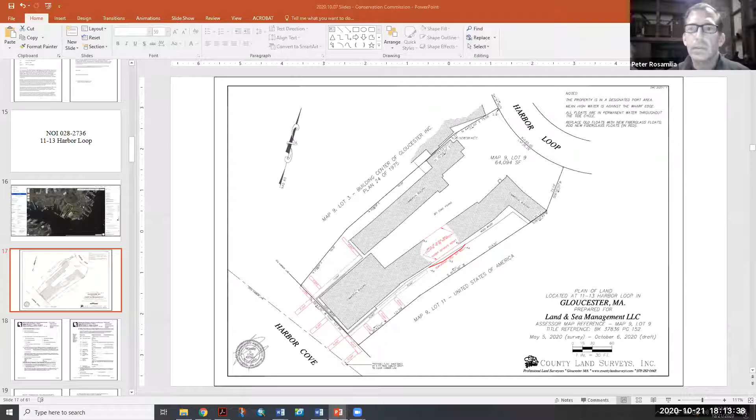All right, let me pull it up for you, Peter. Okay, go ahead, can you see what we see? Yeah, okay. Go ahead, Peter. Name and address for the record, sir? Peter Rosamilia, 1253-1255 Washington Street, Gloucester, Massachusetts, 01930.

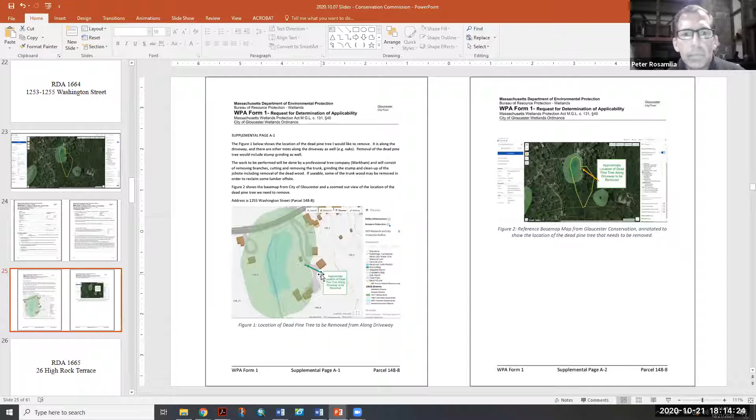The purpose of the request for determination of applicability is that there's a tree lining the driveway which an arborist advised is diseased, or actually dead, and needs to come down. The sketch shows the location - there's a wetlands on the property, and the tree is in the buffer zone, at the edge of it. The diagram shows the approximate location. There are 3 or 4 trees along the driveway, and the arrow is pointing to a pine tree that needs to come down. We want to remove it so it doesn't fall, and we need to do stump grinding so there's no tripping hazard. I believe the RDA was necessary because of the stump grinding.

So the request is for determination of applicability. I have a professional tree organization lined up to do it, and they advised going through the process as well. So I need to know if I can give them the green light to go ahead and remove the dead tree.

All righty then, so why don't we open it up for public comment? Does anybody in the public wish to speak for or against the project at 1253 or 1255 Washington Street? If you do, raise your hand - there should be a raise your hand button on your screen, or star 9 if you're calling in. Do you see anyone there, Adrian? I do not have anyone raising their hand at this time.

Okay, then we'll move on to roll call comments from the commissioners. Commissioner Charpentier, no comments. Commissioner Cook, no comments. Commissioner Feener, I have a question, sir.

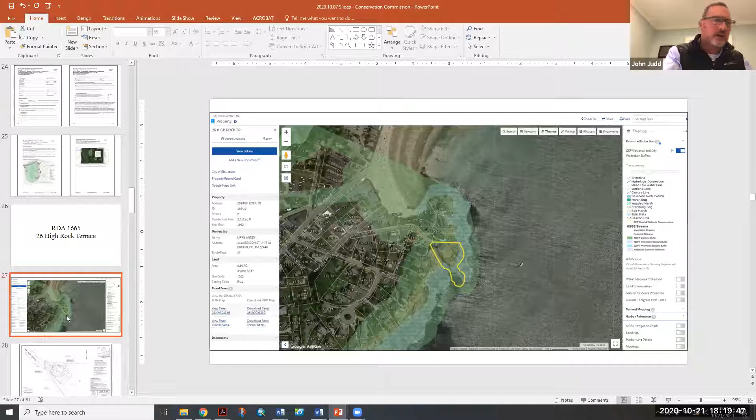Thank you, Madam Chair. For the record, John Judd, engineer with Gateway Consultants. This is a proposed replacement of an existing damaged dwelling situated basically on exposed rock and bedrock out at 26 High Rock Terrace. We're replacing the existing house that was damaged, and it's going to be raised and put on pilings on top of the exposed bedrock.

There's no vegetation to speak of on this property, and the performance standards for Coastal Bank are involved with sediment removal and so forth. There is no vegetation on this property to speak of. By raising the dwelling and pulling it back further from the ocean, it is basically an improvement to the situation on the property. So we're requesting a negative determination to replace this structure as shown. There is essentially no increase in impervious area as proposed, with the calculations shown on the plan.

Okay, thank you very much. I'm going to open this up for public comment. Is there anybody in the audience who wishes to comment on the project at 26 High Rock Terrace? As a reminder, if you're a member of the public watching, you can use the raise your hand button if you're logged in using a laptop computer or smartphone. If you've dialed in, you will dial star nine to raise your hand.

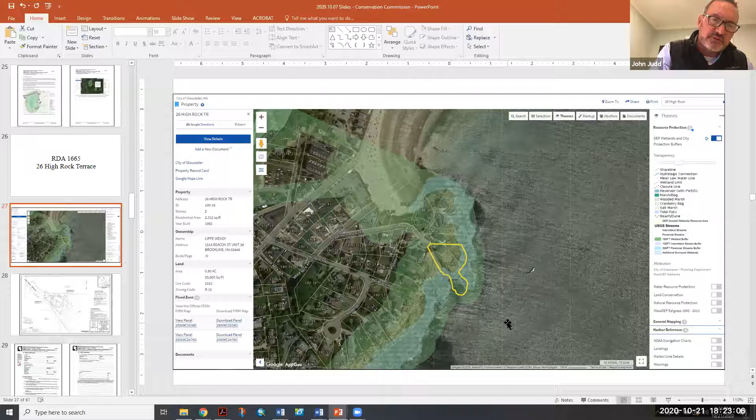So we have shown 76 square feet, which is not a lot. We would like some latitude on landscaping on the property to fit what the applicant would like to install aesthetically. We do have mitigation notes, including native shrubs, switchgrass and juniper, but they would like to incorporate that as part of a more aesthetic landscaping where none exists right now.

Okay, yeah, I have no problem with that. I know it's a hard area to plant. I didn't know if there's any runoff control design from the roof in this new building. If not, maybe we can do a couple of rain barrels to help with the mitigation aspect. I think that would be no problem. Yeah, should add that in. That'd be great, thank you.

Commissioner Gradwell, no comment. Co-Chairwoman Jackson: I had a question, do you anticipate that any blasting will be necessary? No, none at all. In fact, removing that existing concrete block foundation and raising it up would allow for the passage of water underneath the structure, where right now it's all being deflected. I see that as a tremendous improvement overall for the property, and as far as I'm concerned, that grants you some latitude in the landscaping. It's a very small area that you need landscaped.

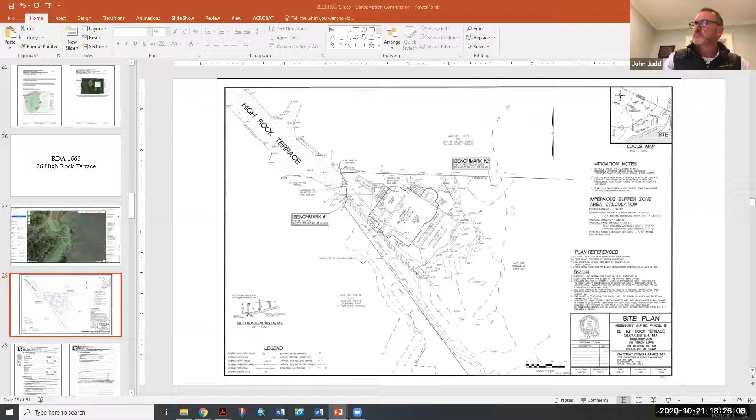Thank you very much. Thanks.

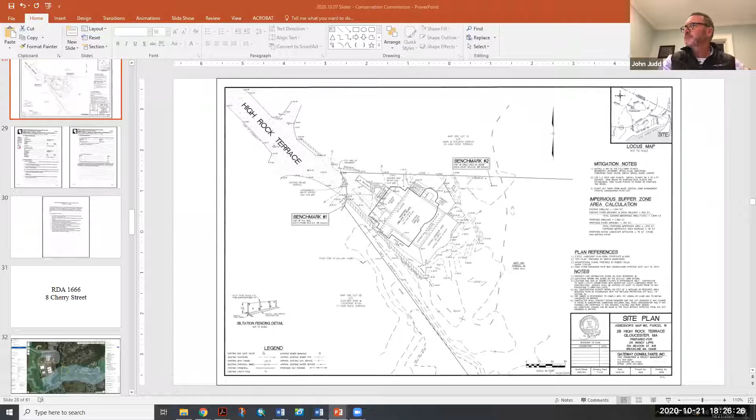Okay, do we have Rob back? Rob? Hello? Hello? Here we are. Yep, it's all yours. Okay, next up. Let me get my glasses back on.

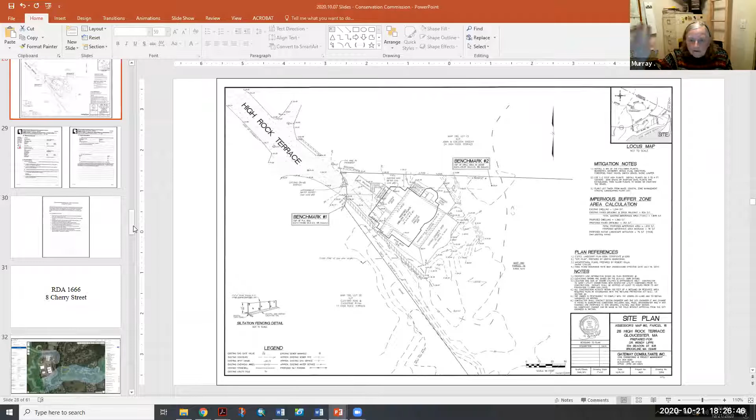RDA 1666. Ooh, a lot of sixes. 8 Cherry Street, Murray. Elizabeth Murray representing the applicant. I see her, but she's not unmuted yet. Right here.

Hello, can you hear me? Can you hear Elizabeth? Yes, yes. So a brief description, first your name and address for the record please. Elizabeth Murray, 8 Cherry Street, Gloucester, Mass, 01930. And my husband, Richard Murray, who lives here as well, is with me.

So we put in a request. You can see this is our property here. We put in a request to replace our damaged garage with a prefab garage, which you can see in this picture. Our garage was rammed and it's in a dangerous condition, and we were ordered to take it down. Then lots of things happened. We had to do the insurance, then we had COVID, then we had a heart valve transplant, and here we are.

We hope we could have done this already, but we hope we can do this fall. So when I was speaking with Adrian, the concern was because we have a perennial stream at the bottom of the property, which is 200 feet from the corner of our garage. We did attach to our form a topographical map showing the distance and also the various topographical lines. So when I was speaking with Adrian, the difficulty was, are we going to have sediment going down to the stream?

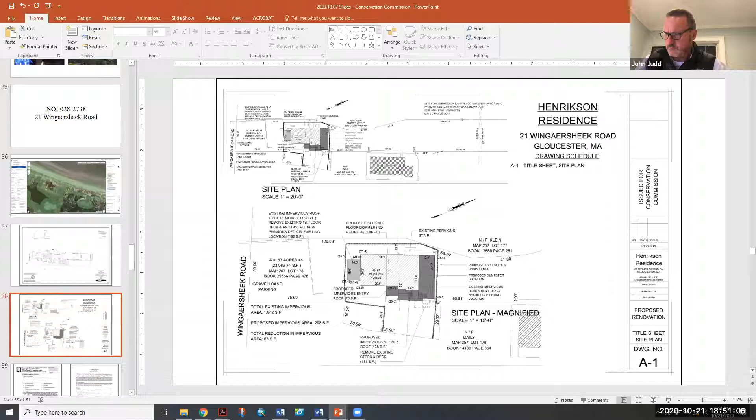Okay, thank you. We're going to open this up for public comment first. Is there anybody in the audience who wishes to comment on the project at 21 Wingaersheek Road? You can raise your hand if using a tablet or iPad, or press star nine if calling in. Seeing no comments at this time, I will close the public comment period.

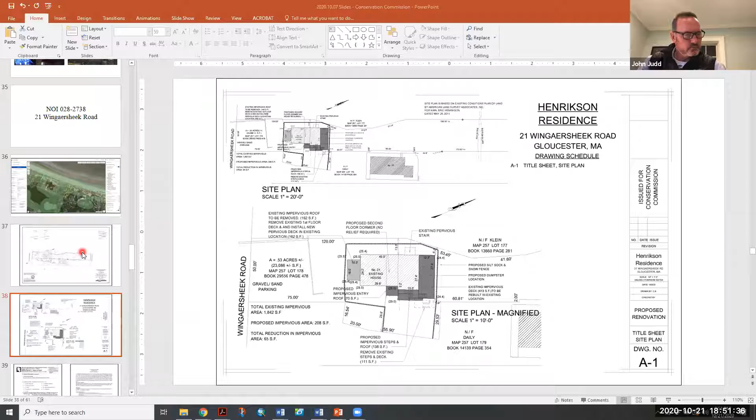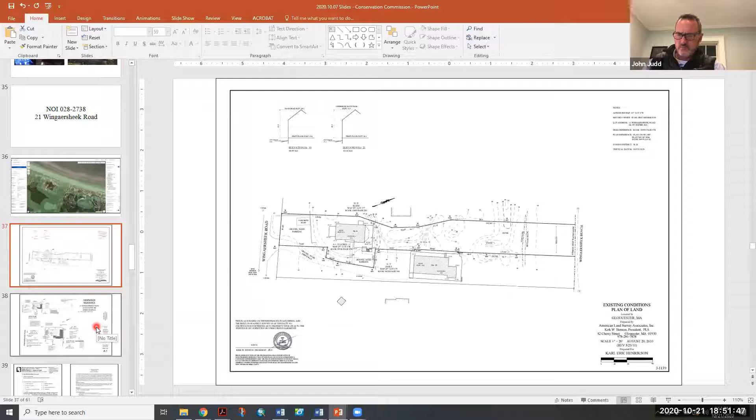We will open this up. Adrian, do you have comments on this? I do not—generally this is exactly what I expect this application to look like, and it comes with an appropriate narrative description. Ideally, I think we should be looking for the applicant to impact as little as possible on the site, because it is such a very well-established upland dune habitat. I'm hoping that the limit of work and the footprint here can be as small as possible. That's all.

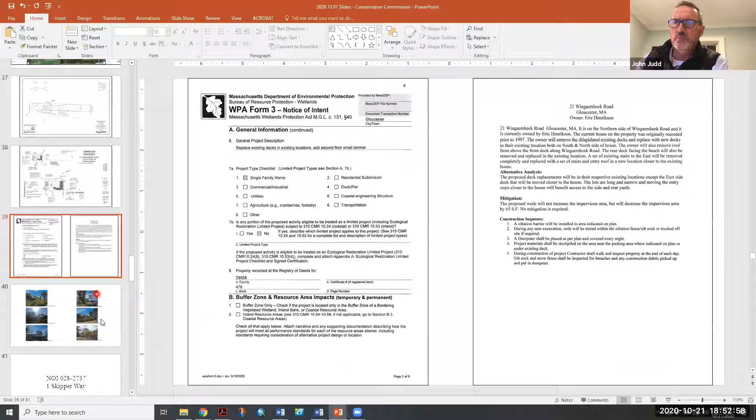John, why in this application have you not added the dead tree as part of removal of the dead pine that's in there? And also the maintenance of the wisteria by the driveway that is obviously pruned back. I think you may want to add this, especially the wisteria, because I'd love to see you have a line setback from the edge of driveway so we know in perpetuity what we're going to allow for safety reasons—we should have that delineated on this plan as it is an NOI. At the same time, it makes sense to try to get that dead Austrian pine out, doesn't it? It's relatively close to the house.

That may or may not, these are unique property lines here, John. I'm not sure that's entirely on this lot. There's a lot that is accessed, number 19, you can see the unique situation. If it doesn't work out, it does really pose a threat to the property owner, so you may want to talk to the neighbor.

But more importantly, the driveway with the pruning on the wisteria and stuff - it looks pretty, cut back a couple of times. The purple viney stuff in the picture, one of the last pictures you have, right here. I'd like to see you put a maintenance line, a delineation, on a plan for me. Yeah, we can certainly add that. All right, great, besides that, that's it. Thank you.

And you can get back to us about the tree at a later date, correct? Yep. So Adrian, my question is, if we think the tree might be on the property, should we condition that in, so if it is, we allow removal at this point without having to amend the plan, and if it isn't, you just say it's not our tree? Yeah, that's fine, I can include that in the order of conditions. And if the work isn't done, then it isn't done. That's fine, I just thought it'd be easier for the applicant. Thank you.

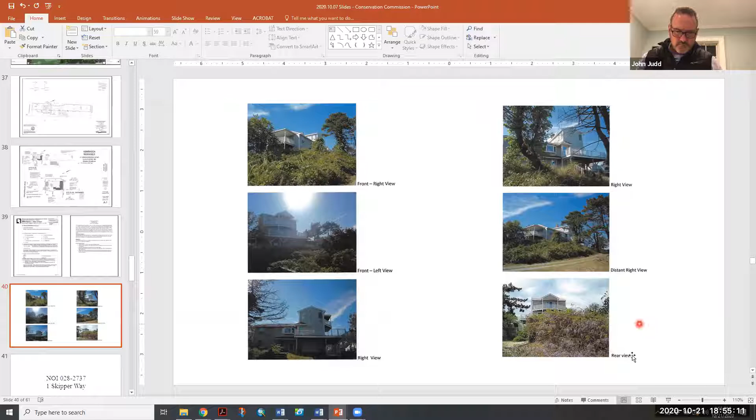Co-Chairwoman Jackson: just a comment on the siltation barriers. How much work space are you going to need? Can we keep this to a minimum? Can you give me a number of feet we can keep it at, John? Yes, we have the dimension for that existing impervious deck at 12.3, and we're about 3 feet beyond it.

So I would say 15 feet. I'm assuming you're meaning toward the coastal dune. Yes, so 15 feet off the main structure. Okay, Adrian, that good for you? Yeah, I mean they're gonna need to access it, but as little as possible because it's such a well-established site - you're not gonna get that back. Okay, so everything you can do, John, to keep that at a real minimum. Sure.

All right, 15 feet max towards the dune. No further comments? Not that I am aware of. Okay, then I will entertain a motion to close the hearing. Oh, actually, sorry about that, I apologize - this project is going to be subject to Natural Heritage Endangered Species Program review, and I do not have anything back yet from Fish and Wildlife. Okay, so we have to continue this. Correct. In that case, John, will you send me an updated plan with a limit of work?

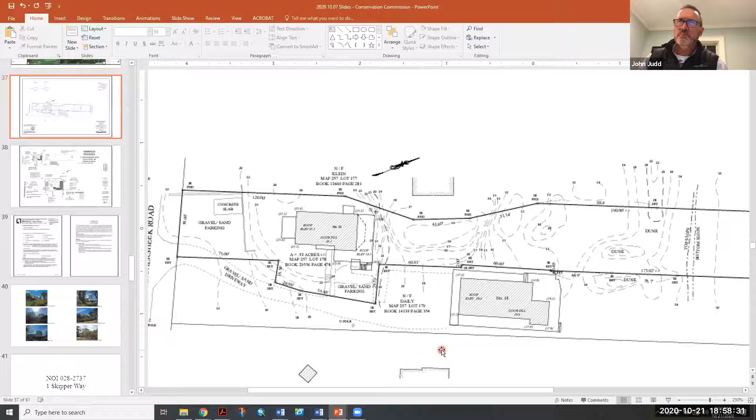Commissioner Gradwall? I see you there. Commissioner Gradwall, yes, thank you. And Co-Chairwoman Jackson, yes, thanks.

Has Mr. Geller returned? Okay, yeah. This is Bill Cook, I have to recuse myself on this one. Okay, can you hear me? Yes.

Okay, so next up is notice of intent - no DEP number yet - but before we do this, I hate to stop in midway, have we got anything from Bill? Bill's here, he's on. Okay, so we can get back to him after.

Next up is notice of intent for One Skipper Way, Russo, John Judd, Gateway Consulting, representing.

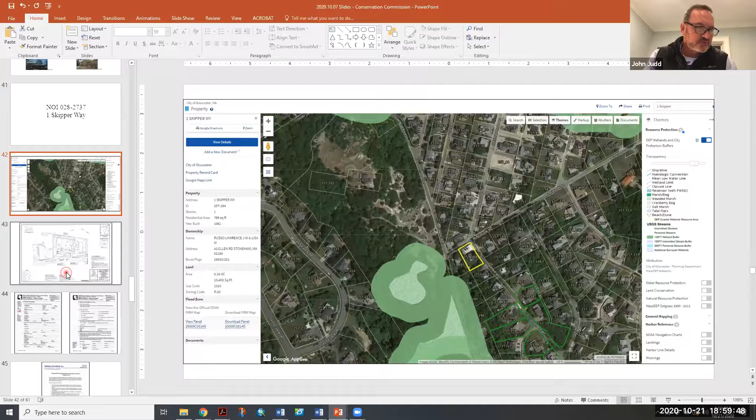It's an existing cottage that is proposed to be replaced. The project has been approved through Zoning Board of Appeals. It was vetted through that board, and the neighbors have all been notified of this meeting as well as that meeting, and they have received the plan as part of the review package for ZBA. So what we're looking to do is replace this structure.

This would be a slab on grade due to the high groundwater on this property. Those of you familiar with this area and this particular spot know that this is at the bottom of Skipper Way, a steep hill, and the water sort of makes its way down here. So we had shallow groundwater, so we are replacing the sewage disposal system with an advanced treatment system.

I spoke to Craig LaPiccolo, the health agent, and he's issuing that permit this week. Again, this is an upgrade for the sewage disposal system, which is currently in failure. And the proposed building as shown is obviously larger, but the reasoning for that is there is no ability to put a basement on this property because of the water table.

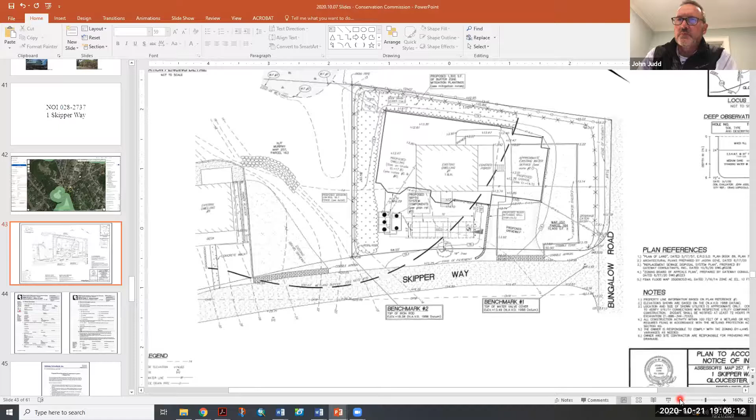But if the rest of the commission is not, again, John and I are obviously somewhat simpatico on this, but I wish other commissioners would chime in. I don't know if they have to, but if someone else has a differing opinion or is in agreement with us, that would be helpful as we move forward with future projects with this relatively significant amount of planting and management of it.

So it doesn't need to, Rob? Yep, it's Anjo here. I would support a planting plan for this. It is extensive.

Okay, we have no problem supplying that, done by a professional landscape designer with native plants of the choosing of the Russos. Is it possible to have that as a condition? That would be the only thing, so they can at least get the process going. Everyone's busy with their design work on that end. And certainly before any building permit is issued, after the appeal period, we would have that plan ready for the commissioners and Adrian.

I don't necessarily have a problem with that. No, me neither. Okay, I had a question for you on that though. So if the planting plan is submitted, we'd like to usually determine if it's going to be an ecological benefit to the area. So if we just wait for you to submit it to the agent prior to the beginning of work, we as the commission are going to have an opportunity to review it. Is that a correct statement? So we can put our two cents in, so to speak.

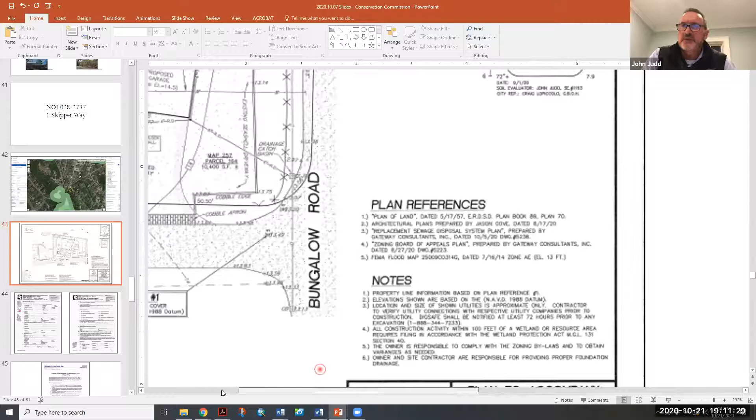Understood. On the mitigation notes in the lower half of the plan, we have some suggested native plants typical for the saltwater area - switch grasses, shore juniper, bearberry, bayberry, as well as beach plum and so forth.

As you know, we typically have a 2-season mortality requirement for these planting plans before the certificate of compliance is given, and Adrian as the agent has the ability to say this is just not adequate when she does her inspections. I can assure you the Russos are quite anxious to do a nice job with the landscaping and make it a nice buffer there. They understand that when we have such an increase in impervious area, this is what we need to do, and they're fully aware of it and excited to do a nice job with the landscaping.

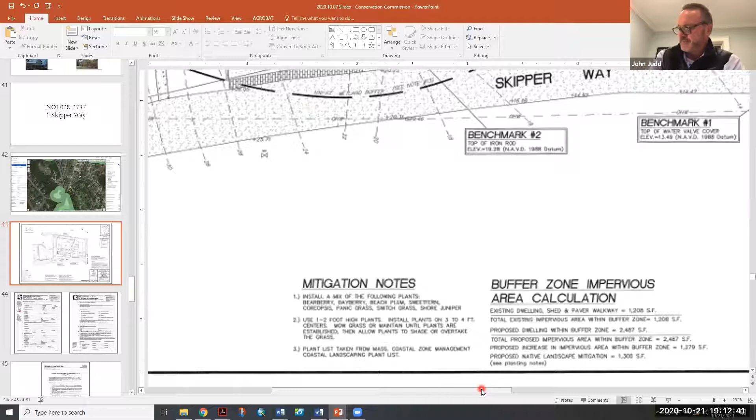I don't know if we want to do a roll call one more time through the commissioners, Adrian, to see if they have any more comments for or against allowing it to move forward with a planting plan.

Commissioner Charpentier: I just want to say I'm good with moving forward with the planting plan. Commissioner Cook - oh, Commissioner Cook is recused. Commissioner Feener.

The only thing about the planting plan listed to me is that sometimes a native species is listed and people often purchase a hybrid of that or a separate variety, and in this case that cannot be allowed. So it has to be true, pure Latin names, no additional varieties. That's one stipulation I would have to have - I can't tell you what to plant, but I can enforce that it can't be a separate variety that could be invasive moving forward.

Second, you have on the planting plan that every plant would be 3 to 4 feet apart. However, you should base that on mature size of the plant material and figure out locations based on height - some might be 5 feet at mature height, some might be 2. You need to plant those based on their mature height, not just a standard 3 to 4 foot grid.

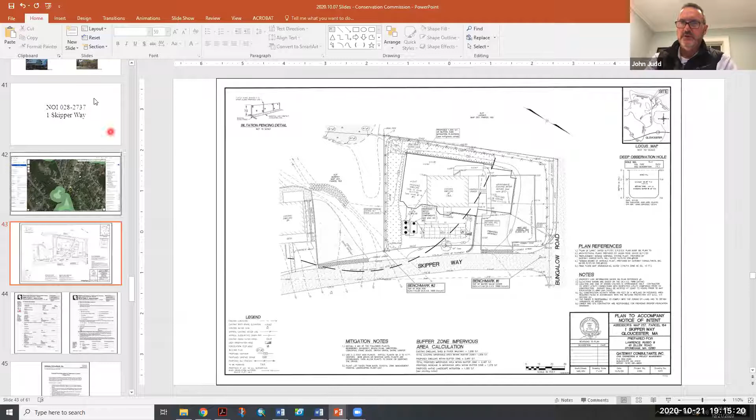Charpentier seconds. Roll call vote: Commissioner Charpentier, yes. Commissioner Cook - he's recused. Commissioner Feener, yes. Commissioner Gradwall, yes. Co-Chairwoman Jackson, yes. And Co-Chair Mangala, yes.

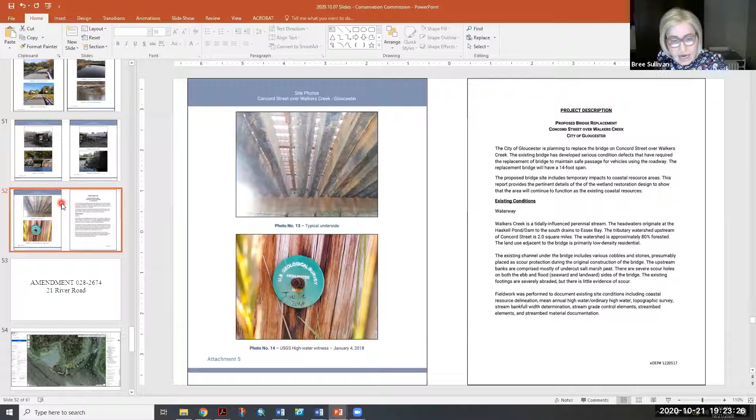The superstructure, which is where the wooden stringers are, is really not the problem with this bridge. So the current superstructure is a welded gridded deck on several wooden, treated wooden beams on concrete capped ashlar granite masonry abutments. And I'm fairly certain that this is dry laid. It may have had some concrete between the ashlar masonry, but typically if it did, it probably didn't last very long in this environment.

So it was probably a dry laid abutment, which in and of itself is actually not that bad. The problem that we have at this location is the footings that the bridge is founded on. What appears to have happened is over time, the currents as well as the chemical makeup and the fact that it's brackish degraded the footings at this location. We were quite surprised when we inspected the bridge to find that the footing is worn away in several locations. And if not for the redundancy of the method of the foundation, this bridge would be in much more serious shape.

So with that, we applied to the state on behalf of the town under their small bridge replacement program. This falls under the small bridge replacement program because it's between 10 and 20 feet. The span of this crossing right now is approximately 14, 15 feet, somewhere in there. So it was accepted as a good candidate for that program, which essentially gives the town funds to repair this bridge. They give money towards the repair and the engineering design for this bridge. I believe the grant was $500,000 at this site.

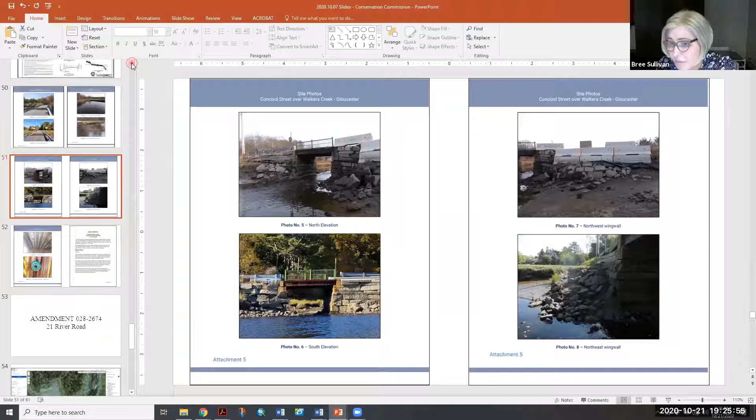So as you can see from the photos, the footings aren't the only issue, of course. We have the northwest wing wall, which has collapsed a few times, mainly because of where it sits relative to the Walker's Creek. When the tide floods or the tide comes in, this wing wall is actually on the outside of the bend. So when the tide is coming in or flooding, the currents will basically impact right at this northwest wing wall. So that kind of erosion action really is hard on an area like that.

So yeah, if you zoom in there, you can see the bend - yeah, there you go. So you can see it comes around the bend, and currents typically have a tendency to be on the outside of the bend. And so it basically runs right into that wall. So that's one of the contributing factors to why that northwest wing wall has had problems.

So what we did when we explored the bridge site is we did a full survey, did some different investigations. One of the things we did is we did borings here, geotechnical borings to determine what the soil structure is under the bridge. And much to my amazement, it's probably the only location in Gloucester that doesn't have ledge. I literally can't believe that we didn't hit ledge. We went down 60 feet on one of the borings and didn't hit ledge. It's like a huge crevasse in Gloucester. It's the only place in Gloucester.

I actually years ago worked, and I'm dating myself, I worked a little bit on the E1 sewer system in town. So I'm dating myself there, I know that was many years ago. So I'm very aware of the geological conditions. I was quite surprised, which really kind of affected how we had to design the bridge. But we'll get into that in a little bit.

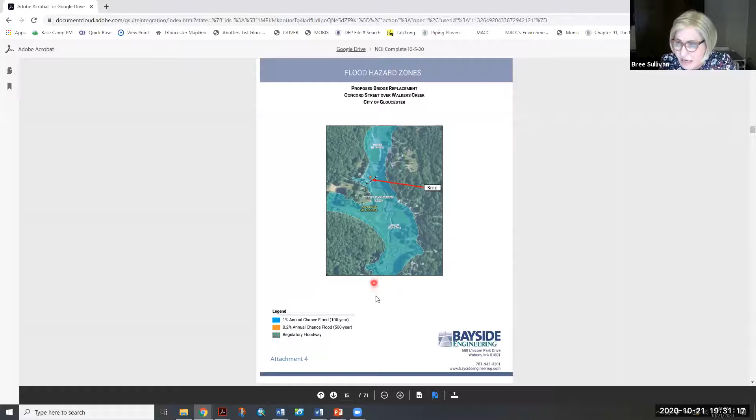Basically what we did is we looked at a number of combinations, and the combination that we choose for locations like this is the 500-year tidal storm surge. And so as you know, living near a creek like this, there are a couple of factors. There's normal tides that are caused by lunar effects. And then there's a tide associated with the storm surge, which is an increase in the tide. Depending on where you are, it can be worse, less or worse.

So in this location, since we have this great record of January 4th, 2018, that's a good measured indication. But what we also did is we also looked at the extreme tides measured at the Boston gauge, because that has the longest recorded tides out of all of the tide gauges.

So we looked at all of these different tides, and actually the January 4th event was not the most extreme event that we designed for. Looking at the combinations, we actually have the 500-year tidal plus the 50-year riverine tide, which means a 500-year tide and a 50-year runoff storm.

And so typically for this type of crossing, because it's a local road, we would only use the 10-year riverine flow to design the bridge. But the combination of the tidal and the riverine, it's really not going to make much of a difference.

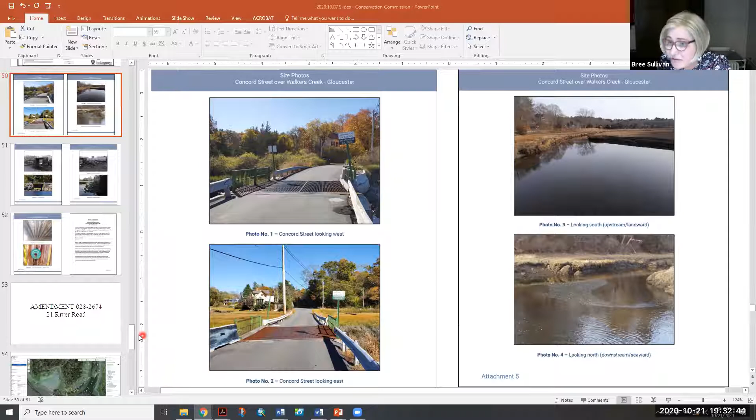Now, one of the things we looked at here is what would happen if we changed the opening. So I don't think it's any surprise if you look upstream and downstream, there are massive scour holes, which says that the bridge is undersized. When the tide comes in and goes out, it has to squeeze through the opening, so the velocity increases and creates scour on the upstream and downstream sides.

So you have this great widening of the creek, and then once it slows down enough, it will narrow back to its normal width, upstream and downstream. So one of the things we like to do is we like to look to see if we can fix that without impacting properties, of course.

And this is a good picture of it here. And as you can see, the landward side is actually, well, I guess they're about the same when it's flooded, the water area is about the same. So we want to look and see if we could correct that.

Unfortunately, if you look at the flood map, this crossing is such a restriction that the ocean side of the crossing, the flood elevation is actually 13. And on the landward side, the elevation is actually 10. So there's a 3-foot difference.

Now, there's some question to, and I wasn't able to find the background calculations for this, but I think the reason why that's 13 is it has to do with wave runup, which we don't get at this location. I think they just carried it from further north.

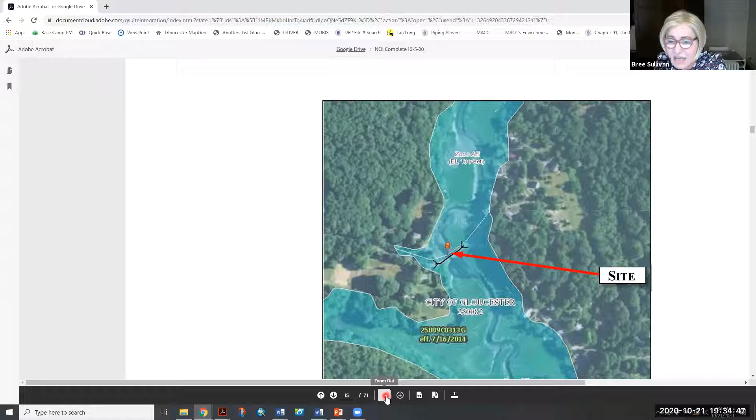Strangely enough, to the west of this site, there's a line where it jumps down to 10, and it's part of this same tributary. Some further analysis was done, and you can't see it here, it's in the flood map. That lends a little credence to the fact that it's probably not elevation 13 on this side.

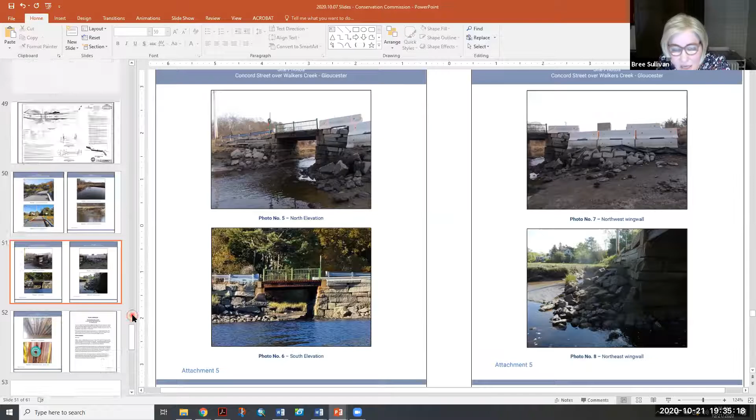But we go with what the federal regulations say, so we use the 13. Now, interestingly enough, the roadway and the bridge crossing is approximately elevation 10. In fact, the intersection is elevation 8. So the bridge sits at about elevation 10 or 9, the existing bridge, and then you go down gradient to the intersection, which is actually lower.

So interestingly enough, when we have the tidal change, when it changes from high tide and starts ebbing, it actually flows across the intersection first. So that's where the greatest relief comes from.

The other thing we look at in these areas is, do we want to raise this structure, get it out of the water? The issue with that is if we raise the structure, it's not going to do a bit of good because the intersection is going to be flooded. And if we raise the intersection too, what we're actually doing is creating a larger dam, which is a larger issue in itself, stopping a lot of the flow at higher flows, and we could adversely impact the salt marsh on the southern side of the street.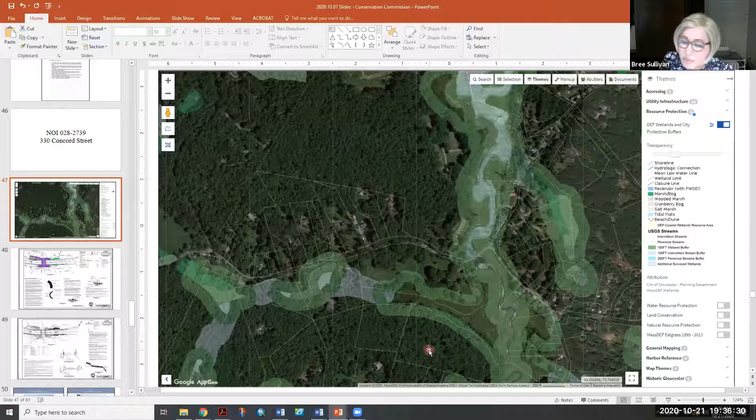So there are a lot of factors at play here, a lot of variables, and they all really point to: we have to do an in-kind replacement with respect to the hydraulic opening. So in an effort to minimize impacts, we determined that widening the road is not advisable.

Now, I understand this is a tough location. The current roadway width in the vicinity of the bridge, within 50 feet of it, is about 15 feet wide, so you're not going to fit 2 cars. You can barely fit a car and a pedestrian without feeling like you want to jump in the water. Widening the roadway here would incur severe salt marsh impacts, and I'm fairly certain the commission would not appreciate that.

So we're basically proposing to replace what we have here in kind with respect to dimensions. The opening under the bridge is going to be 14 or 15 feet, somewhere in there, and the width of the roadway is going to be around 14, 15, 16 feet, somewhere in there. Basically what you see now is what it'll look like after we're done with respect to dimensions.

With the only caveat being that the northwest wing wall has kind of taken on its own life over there, and we're actually going to correct some of that because we're going to put a proper wall in, and there will be some scour protection there for the reasons I mentioned earlier. So that quadrant we're hoping to undo a little of what's fallen into the land underwater. There is no salt marsh on that side.

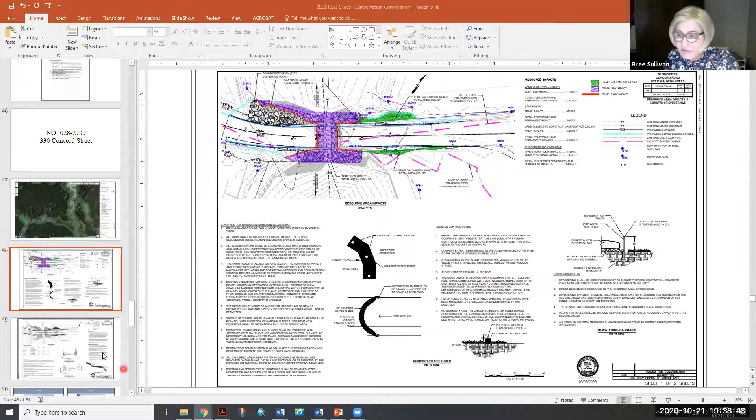So with respect to the proposed structure, what we're looking at, I have to take a look at the bridge plan. In the materials I submitted, there's an environmental plan, which is what we're looking at now, and then there's a bridge plan set, which is the set we send to Mass DOT for approval, for structural approval, called the Chapter 85 process. And this is not the right plan, so let's take a look at this. I apologize, I should be better prepared.

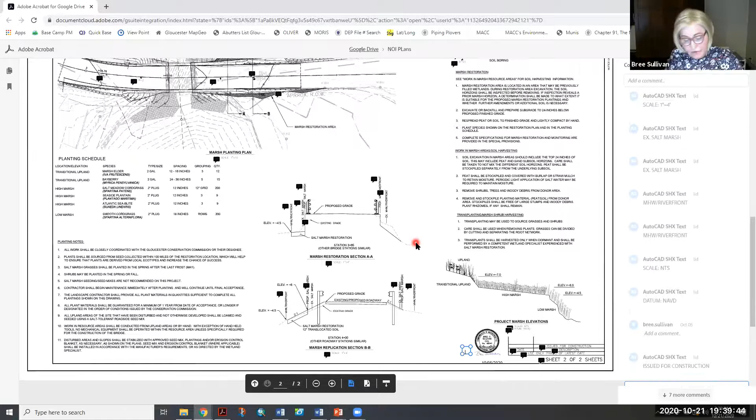So the proposal is to remove the existing structure in its entirety. Essentially what happens in cases like this, where we have to control for the tide, is they would come in and put a cofferdam of some sort to block the water from the construction area. In fact, with crossings like this, that really is the largest single expense, is controlling that water, obviously.

What we're looking at doing is replacing everything right down to the foundation, and that's going to require a cofferdam and removing the existing material.

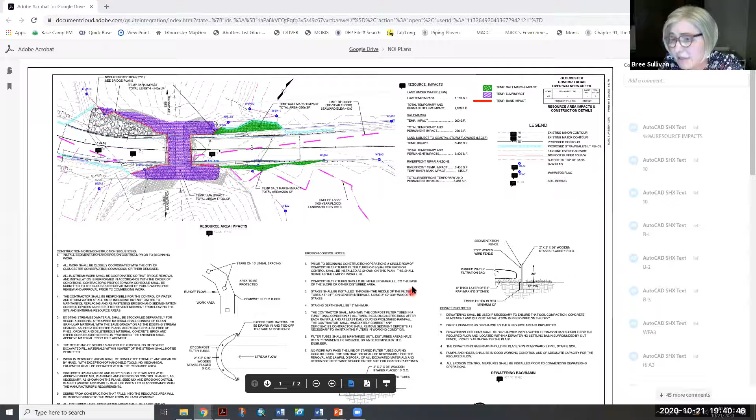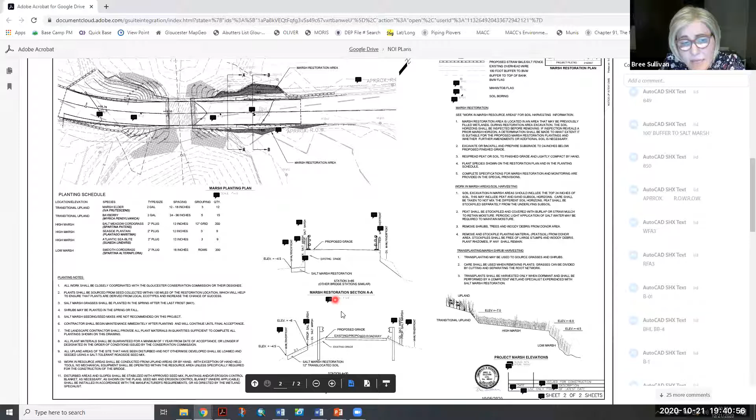With roadways and crossings like this, depending on when they were constructed relative to the Wetlands Protection Act, oftentimes they just pushed material out into the marsh until they reached the place where they wanted to make the crossing, then built it. So there could be all kinds of unsuitable material there, and it can get very in depth when they start digging out the material. They could find all kinds of things.

The plan is to rebuild the substructure with reinforced concrete, specially treated to handle the brackish environment. There are a few things they do to the concrete to make it more durable. Then a new superstructure will be put on the bridge, along with standard bridge rails that will withstand a vehicular impact and keep vehicles out of the resource area.

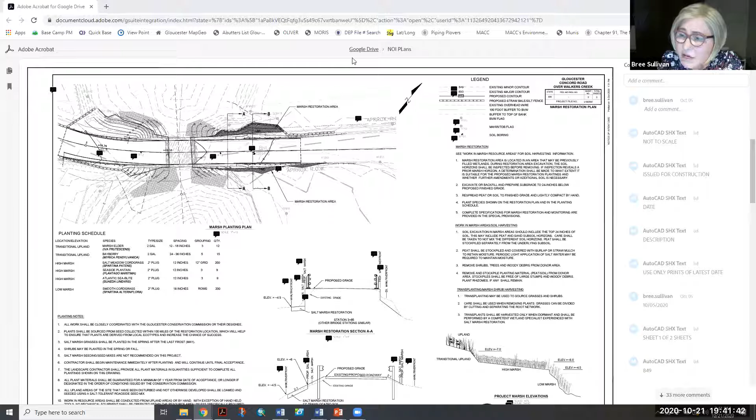These are pretty much the typical bridge rails you're used to seeing on MassDOT projects. The color can be chosen by the municipality, there are a few choices that can be made with respect to that. Typically, green is what people like to use in these areas.

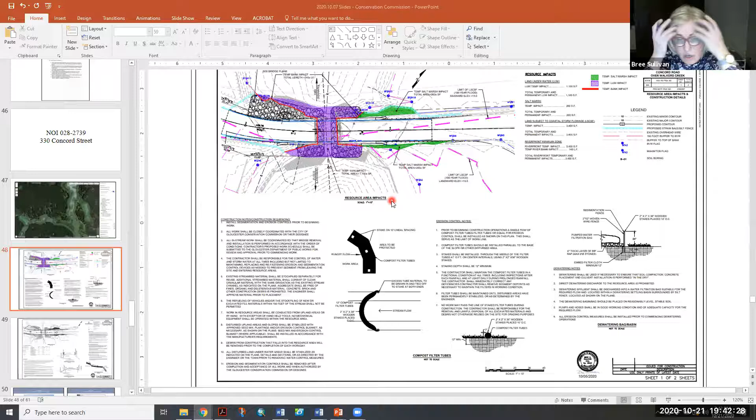With respect to the resource areas, at this site we have salt marsh, land subject to coastal storm flowage, and riverfront area for Walker's Creek. There's riverfront area, land underwater, and bank. The nature of replacing a crossing is working in a resource area.

Probably the only really impacted areas are the land underwater and the salt marsh. The plan is to basically restore the salt marsh after construction, and you can see that marked on this plan. The land underwater is marked in purple, and the salt marsh temporary impact is marked in green. The red line on either side would be the approximate location of the bank.

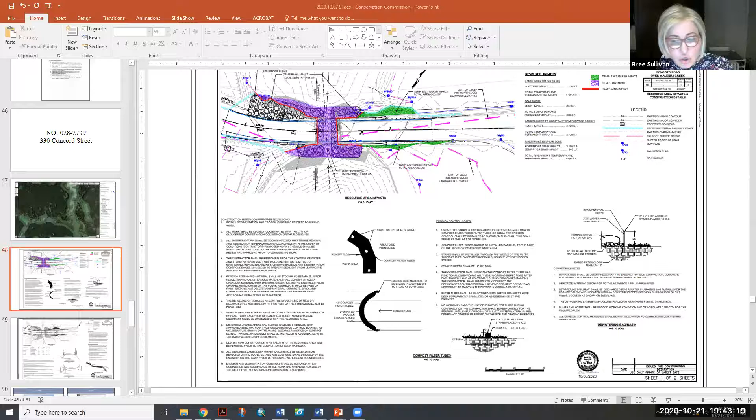If you could go to the next page - the proposal is to replace the structure and then restore the salt marsh. On that plan, you can see the details of the salt marsh restoration plan.

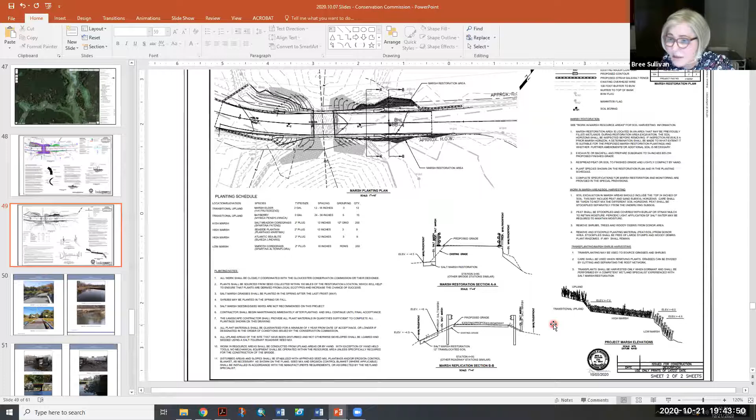Salt marsh has a very specific number of plants in this area, specific species depending on where in the marsh it is: low marsh, high marsh, transitional, upland. These species should be very familiar, and I actually did identify these species at this site. The plan would be to either locally source the replacements or harvest them before construction and then replant them during the appropriate time of year for the best success.

We also have in here a specification for soil if we need to provide additional soil. Typically in these locations, a sandy mixture will work fine. The details are on this plan here, and there's also a narrative - a salt marsh restoration narrative in the notice of intent documentation.

There will be a requirement that a wetland specialist who has specific experience in salt marshes in this area will supervise that portion of the project. That's basically my presentation.

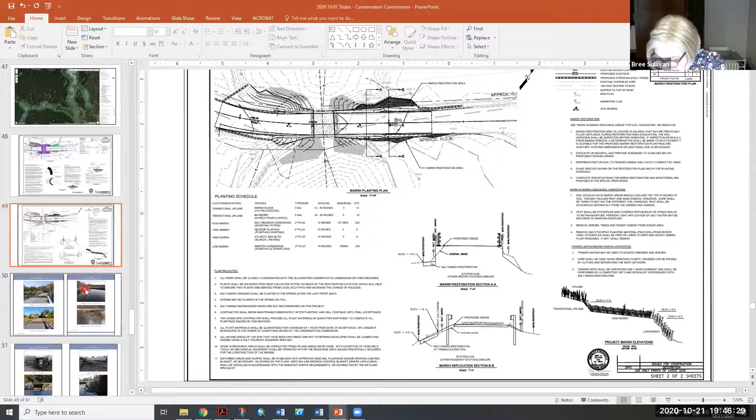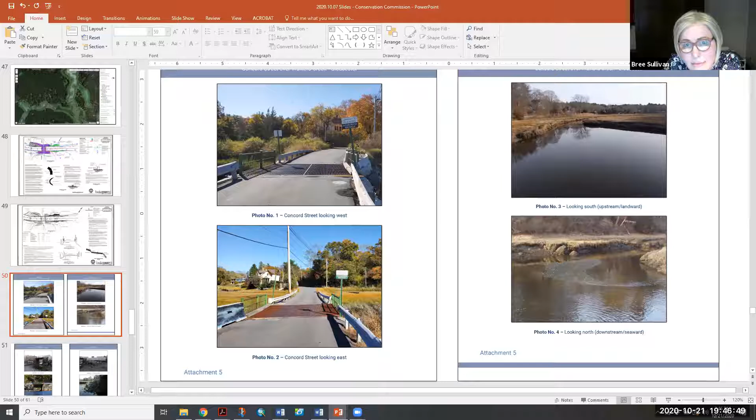This project or area was identified when we were with Mass Bays and looked at tidal restrictions, and this is still going to be a tidal restricted area. As the applicant talked about with the scouring on both sides, I would recommend that to the west side it be opened larger, so there'd be less scouring. I also note that this area contains shellfish - underneath the bridge there were European oysters, and just downstream there were soft-shell clams. So I think there's an omission there, and it's an opportunity for the city to restore a very unique environment between this crossing and the Walker Street crossing.

Surprisingly, there's very little freshwater impact to vegetation. This is a very unique area - it's an ACEC, and I encourage you not to let this opportunity escape us.

And the opportunity being opening up one side, is that it? Yeah, particularly towards the west - towards the east there's more salt marsh, and to the west it's scoured quite a bit on both sides. I'm not surprised that, doing a great deal of soil evaluations in that area, the applicant encountered wash material, because essentially that's what's there.

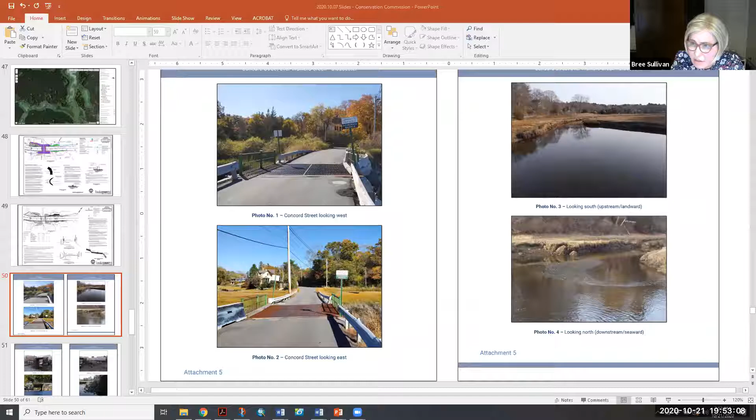So, where when you go to the west, there's a fork in the road there where it could be closed to local traffic only. And then of course at this intersection that we're looking at here in photo 2.

Okay, Bill, did you get your question answered? Yeah, that was the biggest thing, whether they're going to do one side and then the other side, or do both left and right at the same time, and then do something in the middle afterwards. I'd like to see that sequence of how they're going to do that. So that's means and methods, and that would be up to the contractor.

Personally, I would like to see it one side at a time, but I think with the height of this, the amount of bracing that's going to be required to withstand the tide shift, they may actually need the bracing across the channel, but that's up to the contractor to come up with the method that works for them. But there will be in the specifications that river flow must be maintained at all times. Okay, thank you.

Commissioner Feener. I had a couple of comments and one question.

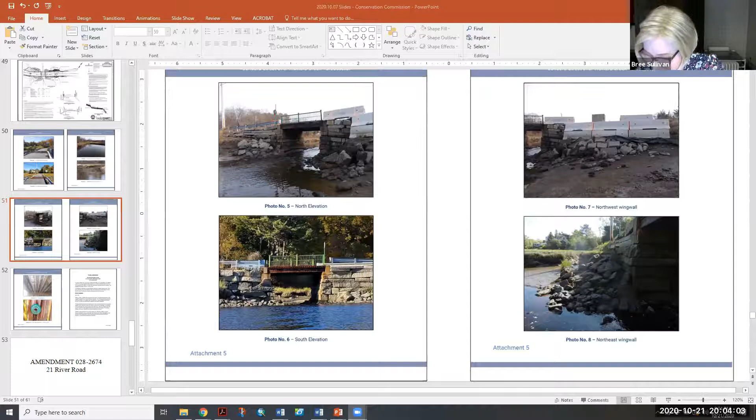Do we have a DEP number? Yes, we do. It is 2739. NOI 028, 2739, 330 Concord Street, to the meeting of November 18th.

Charpentier seconds. And a roll call vote. Commissioner Charpentier, yes. Commissioner Cook, yes. Commissioner Feener, yes. Commissioner Gradwall, yes. Co-Chairwoman Jackson, yes. Co-Chairman Gulla, yes. Thank you very much.

I appreciate it, thank you. Thank you. Have a good night.

Next up, okay, amendment, coming back. 28, online. Whoop. Here's Bill.

28-2674, 21 River Road, Singer. Bill Manuell at Wetlands and Land Management representing.

Good evening. Geez, I apologize about that, King Philip, Adrian. At the time, probably when you were saying, hey Bill, you have anything to say? I was having computer problems here and not getting any audio. It's okay, anyway, I'm sorry those people had to wait around. We just do what we can.

21 River Road, nothing as complicated as that last hearing. This should be fairly simple. The commission issued an order of conditions to do a little home renovation last year, and that is essentially complete. Now the owners would like to replace a small deck and patio that they have.

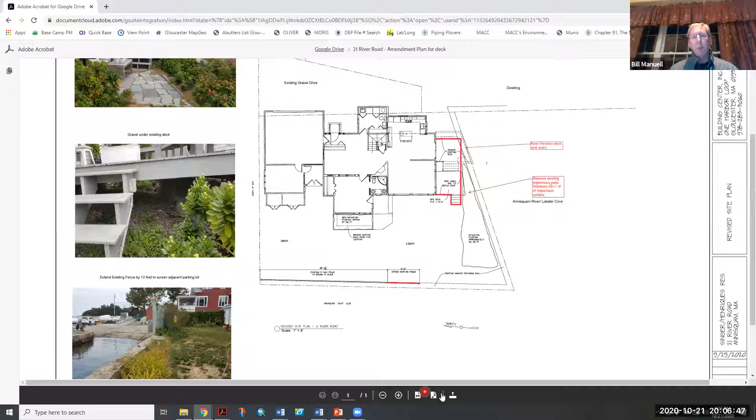So there are two areas of mitigation shown totaling 300 square feet. But our request for an amendment is actually going to take away 92 square feet of that impervious patio, but we're not going to touch the mitigation. So you're actually going to get a little bit more bonus. We'll just do the complete mitigation that you approved.

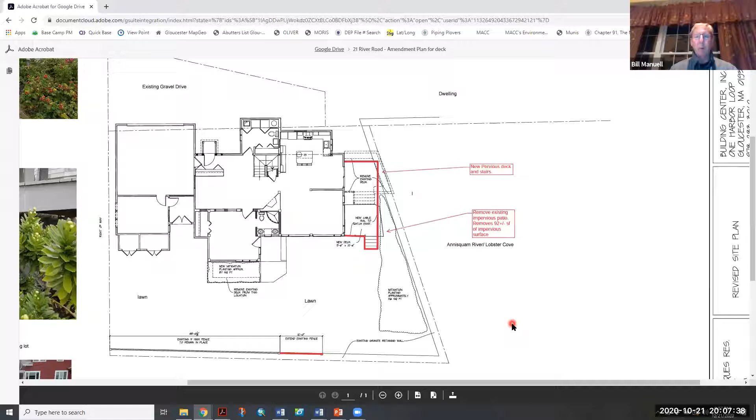Again, zoomed in, there's the red outline of the new deck with the stairs down to grade. Lobster Cove and the Annisquam River are directly to the right of that, and that straight diagonal line is a masonry seawall. It sticks up above grade about 18 inches, so it's the perfect erosion control barrier for the probably 3 or 4 sonotube holes that have to be dug.

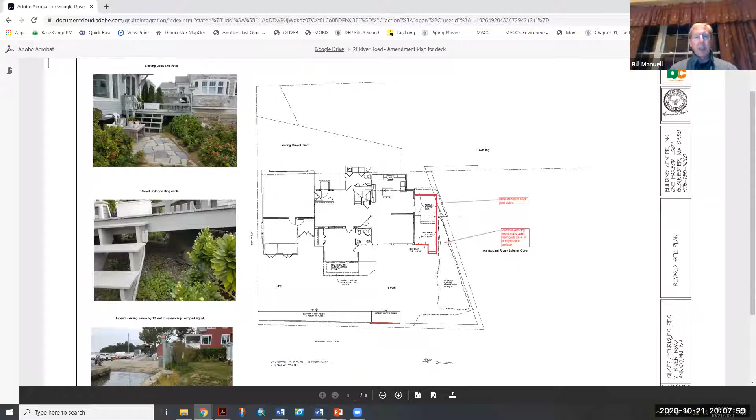Fairly low impact. Over to the left side of the plan, you can see some pictures of the existing deck and the stone patio with the wall, and there's some Rugosa rose along the wall. There's stone under the existing deck, as shown in the middle photograph, and they'll do the same treatment under the enlarged deck. They'll just take out that patio and put some crushed stone there.

Everything becomes pervious. The second part of this amendment request is they'd like to extend a wood privacy fence between this site and the yacht club, at the very bottom of the plan. They'd like to extend the fence by 12 feet, which would give them a little privacy, because right now the boat launch for the yacht club is directly on the other side of that fence.

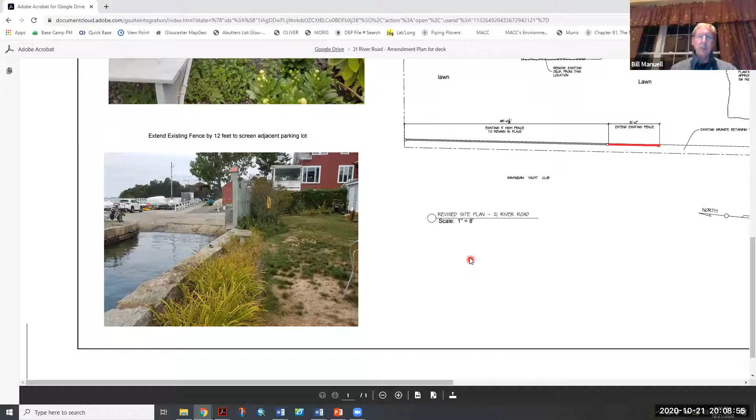It's got some great views right into their picture window, into their living room, so they just want to extend that fence 12 feet. The current fence sits on a granite block wall, so that will continue, just push that out another 12 feet, meaning no impact to the ground surface. So you get a little bit of improvement here: 92 square feet less impervious surface, and we'll keep the original amount of mitigation. Hopefully you'll see your way to an amendment here.

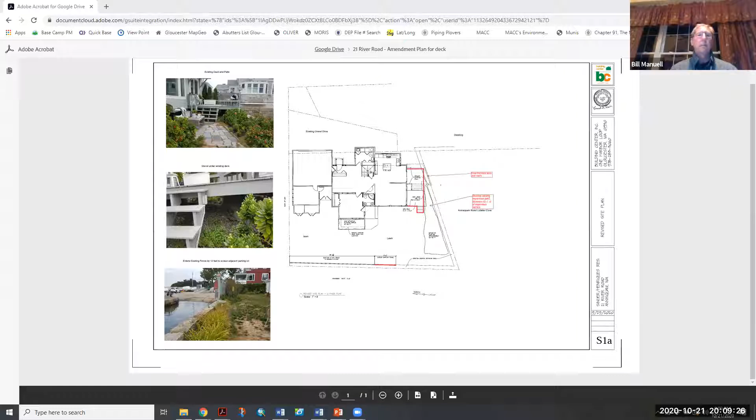Okay, first off, why don't we see if there's anybody in the public who wishes to speak for or against the amendment for 21 River Road? If so, please put your hand up. There's a button on your screen to put your hand up, or if you're on the phone, *9. Do we see anyone, Adrian? There are no comments at this time.

Okay, then, why don't we do roll call? I don't really see any issues at this time, so I would pass on roll call for comments from the commission.

Commissioner Charpentier, no comments. Commissioner Cook, no comments.

Commissioner Feener: I was curious, the patio that's presently there, you're classifying as impervious, but on other plans I've seen it just be called pervious because it has spaces in between the stones with sand and vegetation coming out of it. So I think it's kind of funny that you term it based on your needs. That being said, the vegetation that's going to be covered is not going to live past it, like some of the rosa and some of the other shrubs there on the right side. I know you're going to do mitigation and keep the other mitigation, but I want to make sure it's understood that there's going to be some mortality of pre-existing shrubs, and I don't know if you really truly want to consider that an impervious surface. I guess we have to go by what was originally accepted on the prior plan. I don't know if it's delineated on that plan, but that's what we have to go by.

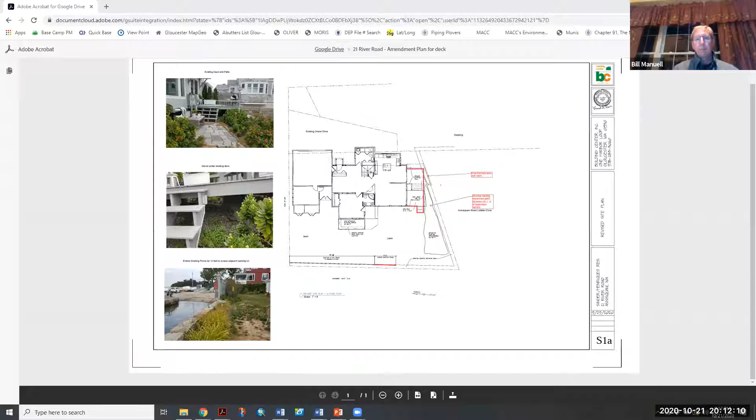Okay, thank you. All right, next. Mr. Gradwell, no comment. Co-Chairwoman Jackson, no comment. And Co-Chairman Gullah, no comments. Thank you.

So with that, if there are no more comments, should we put a motion together to close the hearing on this? Are we looking to approve? I don't see any major obstacles other than maybe a few caveats from John when he gets his turn, but I'm okay with this. Adrian, did you have any issues with this? No, I don't have any concerns. I also want to point out fencing is an exempt activity, it's considered a minor activity in the interest of the act.

Excellent. Okay, then can we get a roll call vote for the closing of the hearing? Jackson moves to close the hearing for amendment 0282674, Charpentier seconds. Roll call vote: Commissioner Charpentier, yes. Commissioner Cook, yes. Commissioner Feener, yes. Commissioner Gradwell, yes. Co-Chairman Jackson, yes. And Co-Chairwoman Gullah.

I mean, so, that's look at it. I've been called worse. With love, all the love. Co-Chairman... well, for Gullah, the first and last time I'm called a woman. Okay, yes.

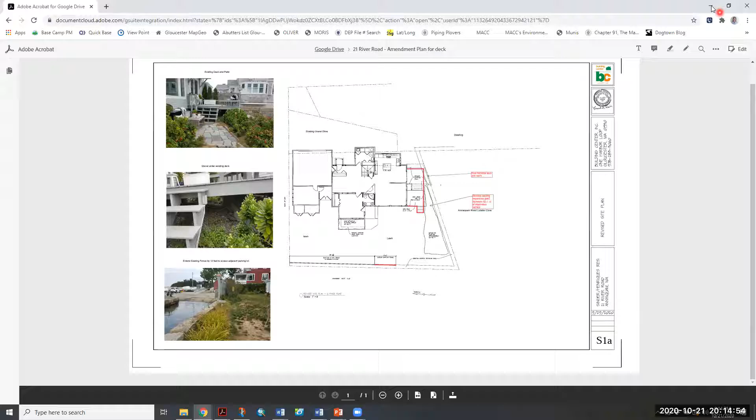No, we have more. Bill, are you still on? Yeah, you better stay on. There is an amended order of conditions, and an extension permit request.

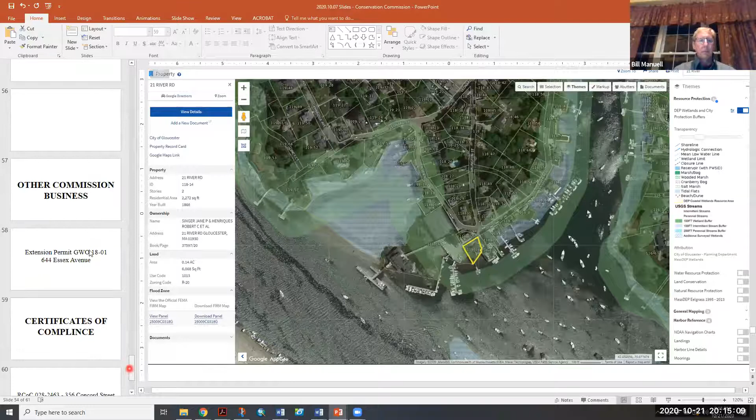So I will show you here at the top. I posted, got mine off the website. Did it change today? Yes, I have to post a revised agenda the day of meeting these days.

The commission does have a continued business deadline, which means that anybody who has a consent permit request, which would be an extension permit, a request for certificate of compliance, the very rare case we hear a minor mod, or any other items or an emergency cert, can come right in until 2 p.m. The only reason that deadline exists is because the city clerk's office holds the line for 2 p.m. to post same-day agendas.

What has been happening, because I'm not in the office and my clerk is not there on Friday, typically we have always communicated that Friday close of business for the city is the deadline for continued business items. That gives me the opportunity to post an agenda and all of you a chance to review it on the weekend. However, there is no one in the office on Fridays, so mail received on Friday is not even seen until Monday, and it continues to come in. There's not a lot I can do to hold that at this time.

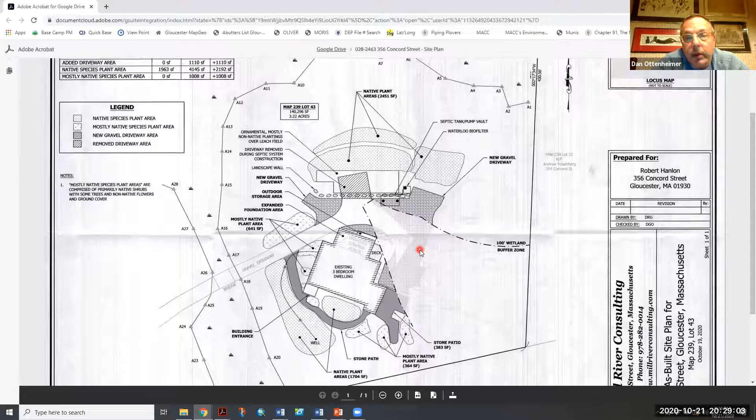I want to be above board about that, but I really don't think anything was untoward here. I do think, on his own, the owner put in a ton of additional plantings, mostly native, beyond what this commission had asked for.

So that's the background. Excellent, I really applaud you coming forward, Mr. Ottenheimer, with this. Some people would just try to push it through at one sitting rather than wait and tell us, or could have just tried to wash it away, but we appreciate the drawing and the time. That being said, Adrian, are you okay moving this forward with that drawing in place?

Yes, without doing a site visit, the application package for this request also very obviously shows the establishment of the planted gardens and the stabilization of the site, as you can see here.

So the concern when reviewing a request for certificate of compliance is: is the work complete? Are the soils stabilized? Are there erosion issues on the site? Do we have a future concern for impact into the resource area that would require we keep the order of conditions open? The impact or delta in the plan itself is really de minimis when taken into consideration the scope of the entire project.

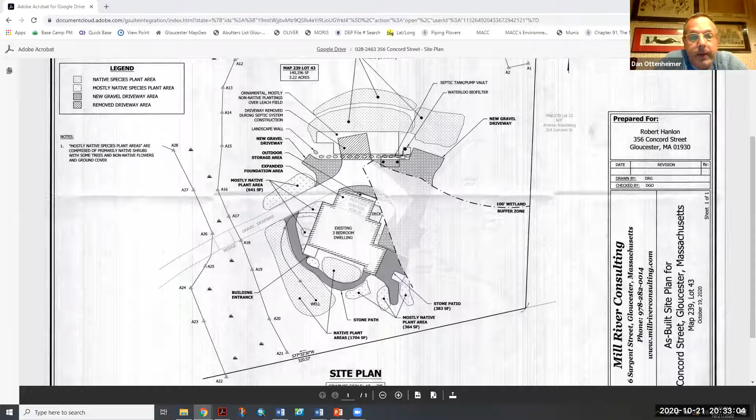In the area that was in the approved plan that was to be 100% native, that is 100% native. And then the additional stuff he just did because he wanted to. Right, and we've allowed exotics before, and that's fine. I just want to make sure you can put native and exotic accepted plant material - it's just that 'mostly' is kind of gray. I don't want to see that in the future and have people copy it. That's all. Yep, what you're saying makes sense. Just some specificity - wow, I said it right, it's a hard word.

Specify. Okay, so with that, Anjo, do you want to put forth a motion for the approval of the RCOC? Certainly. I move to approve certificate of compliance for RCOC 0282463 at 356 Concord Street.

Charpentier seconds, and a roll call vote. Commissioner Charpentier? Yes. Commissioner Cook? Yes. Commissioner Feener? Yes. Commissioner Gradwell? Yes. Co-Chairwoman Jackson? Yes. And Co-Chair Mangala? Yes.

Thank you. Thank you, Mr. Ottenheimer, have a great night. Thanks commissioners, appreciate your time. I'm glad you showed up.

All right, are we good? We are good, that is all to be covered. Rob, Adrian, I had quickly, a question for you - there's a letter about the Haskell Reservoir in the folder.

Yeah, so that's a really exciting story that's spinning up, isn't it? What's happening, what did I miss? Well, you were there with Melissa Cox's meeting, at Haskell. Oh, I didn't know that was Haskell Pond, I thought that was - isn't it? Oh, I get it, for the gun range. Yes.